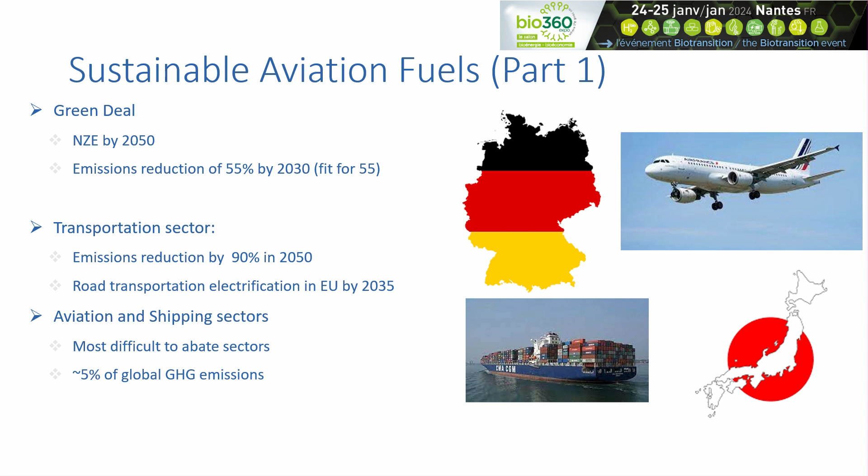So to do so, the International Maritime Organization has set a target of reducing greenhouse gas emissions by 50% in 2050 with respect to 2008. And then the European Parliament, in the framework of the Green Deal, has set more ambitious targets of reducing by 80% the carbon intensity of shipping activity.

And concerning the aviation sector, these targets are more in terms of the use of sustainable aviation fuels, where we have to reach 70% of sustainable aviation fuels in the energy mix of aviation. And with the International Civil Aviation Organization, we already started with a target in 2020 of net zero growth of CO2 emissions of the aviation sector.

So alternative fuels constitute one of the most solid pillars for the decarbonization of shipping and aviation sectors. If we talk about SAF, in 2019 we started to see the first flights using SAF. At this moment in Europe, SAF represented 0.05% of fuel used. The production of SAF has accelerated, and in 2023, the share around the world is around 0.16% of sustainable aviation fuels.

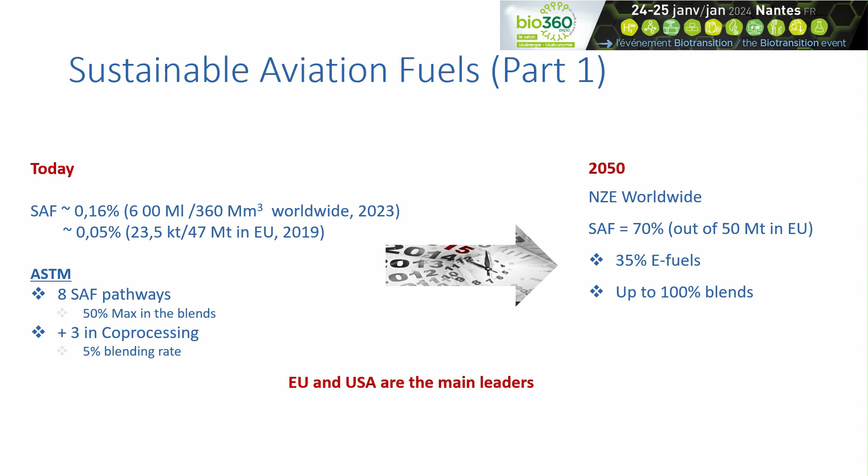So by 2050, we have a long way to go to reach net zero emissions worldwide, according to IATA commitments. In Europe, we have to introduce 70% of sustainable aviation fuels in our mix, which means we also have to increase the blending part to reach 100% blends. And we have a specific target on e-fuels that should cover half of the SAF targets in 2050.

So to reach these targets, I have tried to list here the most important challenges we have to face. First, increasing the potential of different feedstocks and the incorporation level. For the moment, only the HEFA pathway is produced at industrial scale, but we are limited with lipid feedstock. Then we have the 7 other pathways dealing with different kinds of feedstock, including lignocellulosic and waste. And we also have biogenic carbon dioxide and hydrogen from renewable electricity production. So we have to deal with all of these challenges in order to increase the feedstock.

Then according to ReFuelEU Aviation, we have to build around 110 new plants in Europe. And we also have to increase the SAF part in the blends to reach 100%. There are some companies working on that. Rolls-Royce, I think, already has engines that will deal with that, and Airbus is targeting 2030 for this application.

There's an important challenge related to de-risking the investment, so we should have clear and stable policies, and we also need decision tools, because for a certain scenario or feedstock, we have different pathways to choose between. We should have some decision tools to help choose the best solution.

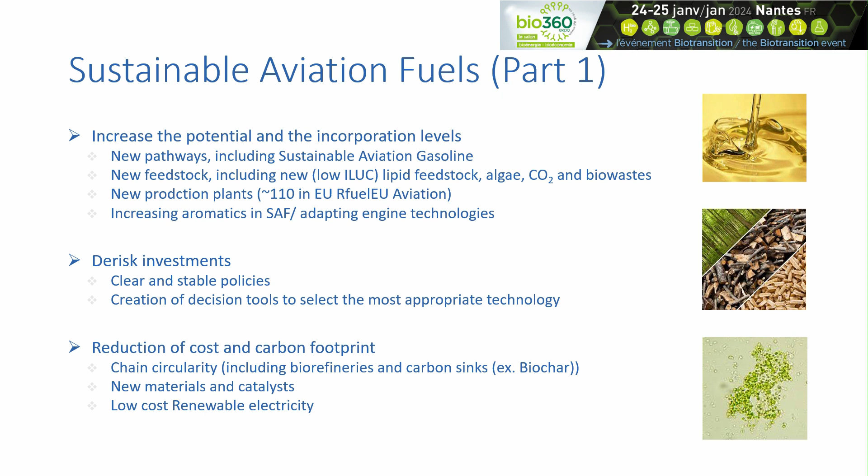We have also to bring new materials and catalysts, and to go further and further with low-cost renewable electricity, which is the case with increasing the renewable share worldwide.

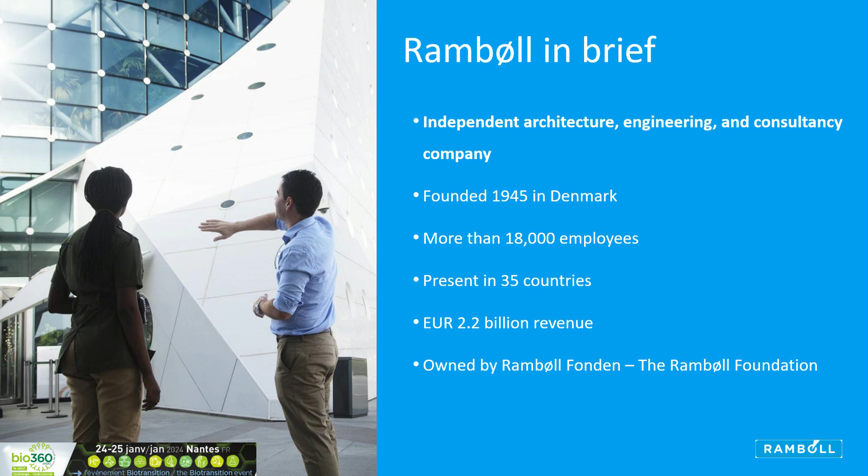Ramboll undertakes projects worldwide with a strong presence in the Nordics, the UK, continental Europe, North America, and Asia Pacific, and can provide sustainable solutions within 7 markets, which are energy — the one I will mainly speak about today — but also buildings, transport, environment and health, water, architecture and landscape, and management consulting.

At Ramboll Energy, our aim is to support our clients' strategy plans and projects and assist companies to reduce carbon footprint, navigate the integrated energy system, and implement smart and innovative solutions.

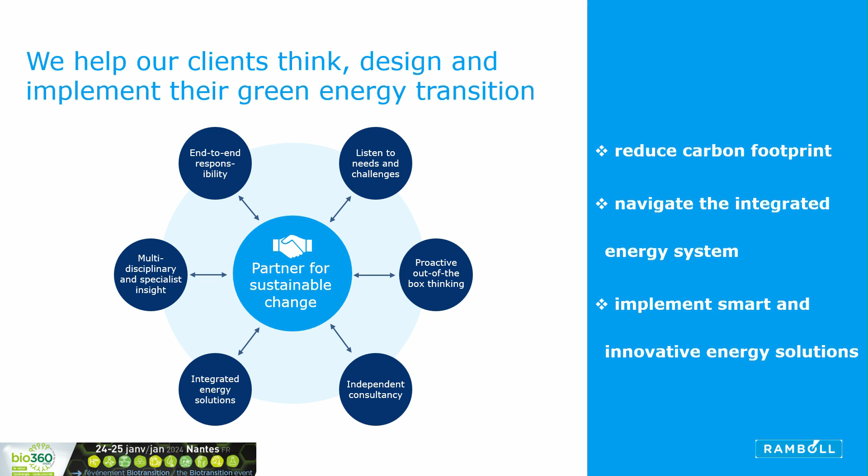Ramboll Energy has more than 50 years of experience in the planning, design, and implementation of energy solutions. But what Ramboll Energy can actually do is provide full project lifecycle services. And what do I mean by that? We can support projects from the very early phases by providing feasibility studies, conceptual design, and technical due diligence.

Following by environmental services, detailed design of plants, FEED studies, owner's engineer, and EPCM, just to mention some of them.

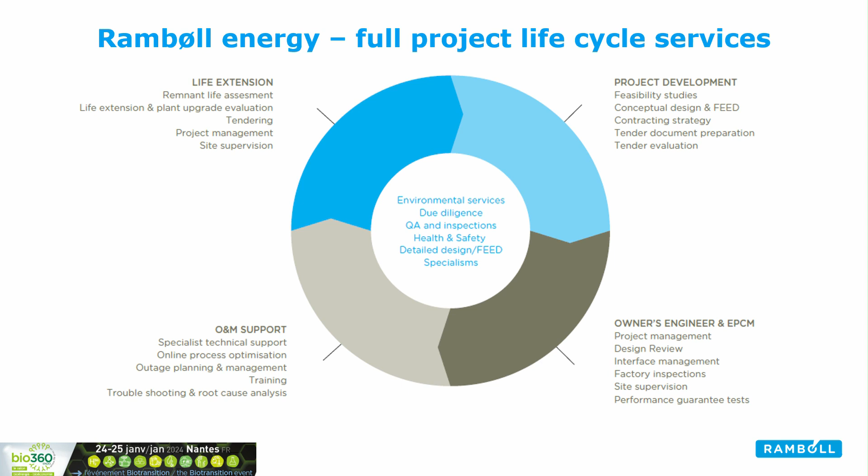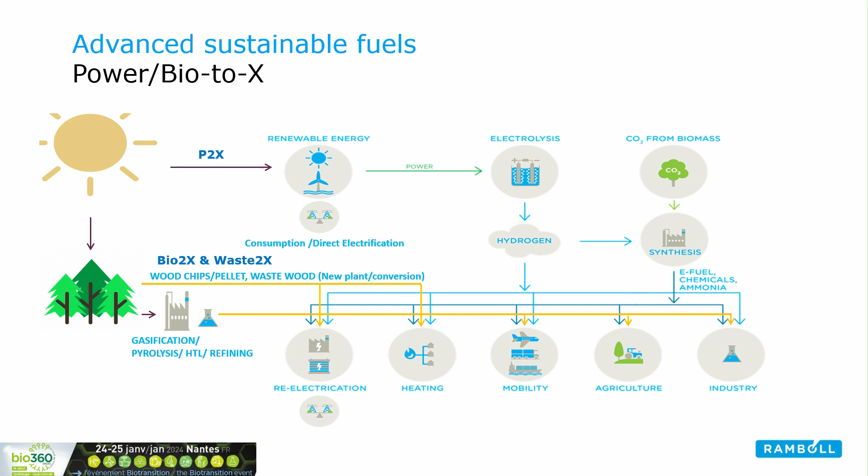At Ramboll Energy, there is a big list of expertise, and one of those is biofuels and Bio2X, as well as green hydrogen and Power2X. The combination of bio and Power2X can lead to the production of biofuels that can be used in the mobility sector, among other sectors, and SAF is an important part of the mobility sector.

Just to briefly mention, in Europe, 3 countries — Germany, France, and United Kingdom — will be the ones that will have the biggest need of SAF by 2050.

Based on SkyNRG calculations and announcements, power to liquid and alcohol to jet using waste will be the main 2 technologies to produce sustainable aviation fuels by 2050.

In order to cover the amounts required by EU mandates, about 400 sustainable aviation fuel plants have to be built by 2050. As for the US, in order to cover the required amount of SAF based on US mandates, approximately 750 SAF plants have to be built by 2050.

So there are 8 certified methods to produce SAF based on the ASTM D7566 reference. In most of them, the blend level is up to 50%. However, for synthesized isoparaffins from hydroprocessed fermented sugars, and synthesized paraffinic kerosene from hydroprocessed hydrocarbons, esters, and fatty acids, the blend level is only up to 10%.

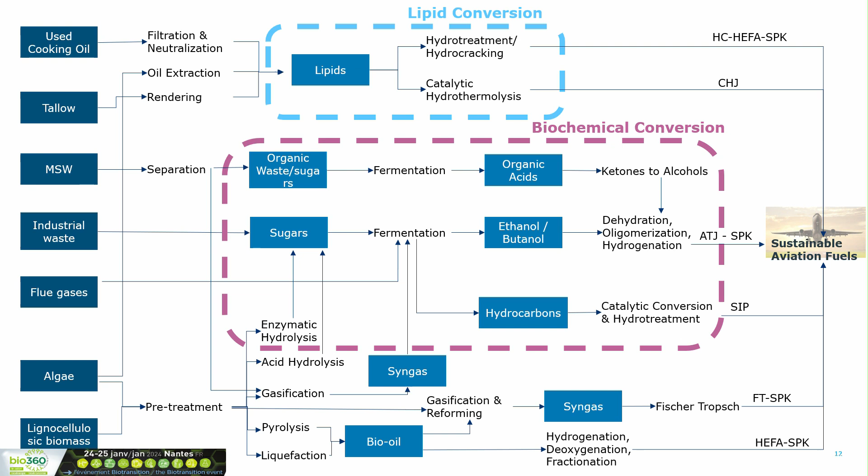And finally is the thermochemical conversion, where technologies such as gasification, pyrolysis, and liquefaction can be used to produce syngas or bio-oil. Fischer-Tropsch technology is applied for syngas, and some hydroprocessing steps for bio-oil, in order to finally produce SAF.

Ramboll has all the expertise in-house, combining them with market player viewpoints and official literature, meaning official publications, articles, specific databases, in order to provide robust market assessment and actually answer questions of our clients based on availability of feedstock in a specific area and how much this feedstock costs.

Can this feedstock have stable composition throughout time in order to have a stable SAF production? Depends on the feedstock. What is the best route in order to produce SAF? And what are the key off-takers? As hydrogen is an essential part to produce SAF, what is the cost of electricity and hydrogen in the area of interest? And what are the possible changes in the future?

What is the expected market sale price of SAF? There are a lot of forecasts giving values. Do all of them agree? What is the conclusion if we combine or compare all of them? And of course, information related to regulations and subsidies. These are only some of the questions that we can answer to support our clients in making decisions around SAF.

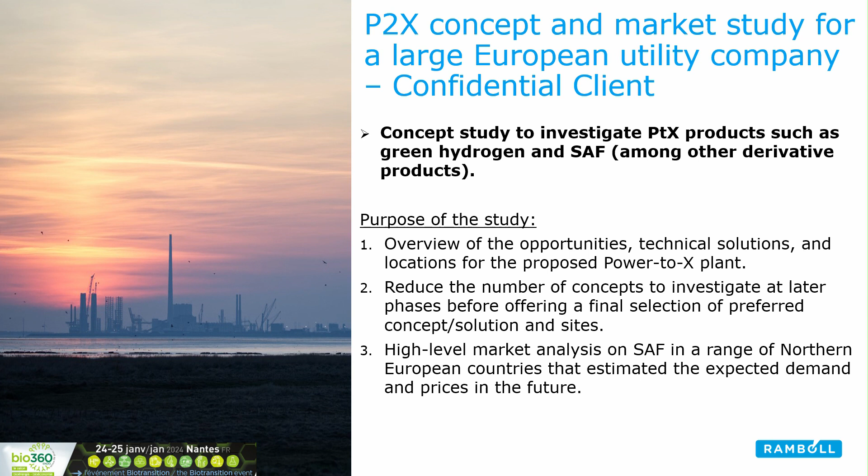The third reference is, again, a market study to determine the viability of selling SAF, but in the Nordics, Poland, and the Benelux region. By analyzing market trends and drivers on SAF, Ramboll offered detailed forecasts on volumes and prices of SAF by 2030 and 2050, supporting the decision-making process of the client.

In the fourth reference, the Norwegian aviation industry assigned Ramboll to investigate and assess possibilities for profitable and sustainable aviation fuels. The study included information such as feedstock supply and available production technologies, as well as a policy instrument study, in order to understand what it takes to implement SAF at the Norwegian airports.

All in all, in order to acquire the required amount of SAF by 2050, projects have to be developed properly. And to do that, successful collaboration between stakeholders is essential. Synergy between bio and power-to-X technology, as well as development and optimization of technologies, is needed to acquire a proven technical concept. It is very important to have accurate information on feedstock availability in order to secure it, as well as a competitive feedstock supply chain.

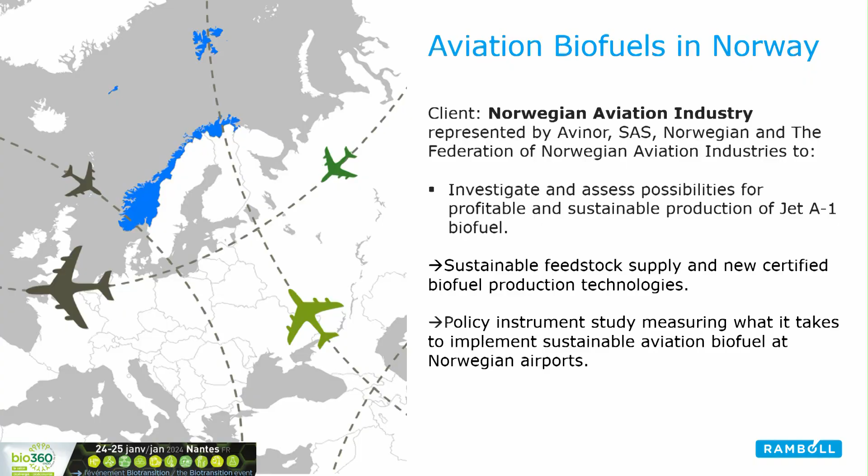Oh, there is actually. So, how can I go back to the graph? The red one.

But this is like sugar to fermentation, you are talking about ethanol, alcohol to jet. But in the biomass, let's say the waste of a sugar factory, for example, like beet pulp or molasses, you can go to gasification to produce syngas. From the syngas, you can add green hydrogen, or complete purely with the syngas to produce methanol, green methanol, or sustainable aviation fuel.

From biomass. Yes. Okay, here I have the lignocellulosic biomass from agriculture, but it's not... Yeah, it's second generation. This is the classical way, just feedstock available around the world, fermentation to ethanol, then alcohol to jet to SAF.

Yes, but from biomass directly to syngas, until now there is no clear pathway approved for this. I mean, I have it from municipal solid waste, maybe, but maybe not the industrial waste. Yes, it goes to sugars.

Okay, no problem. I think maybe it falls under lignocellulose biomass, like wood or beet pulp or any other lignocellulose. Second generation, like straw, you mean? Because I consider only second generation feedstock here. Yes, second generation. Yes, sure. Okay, thank you.

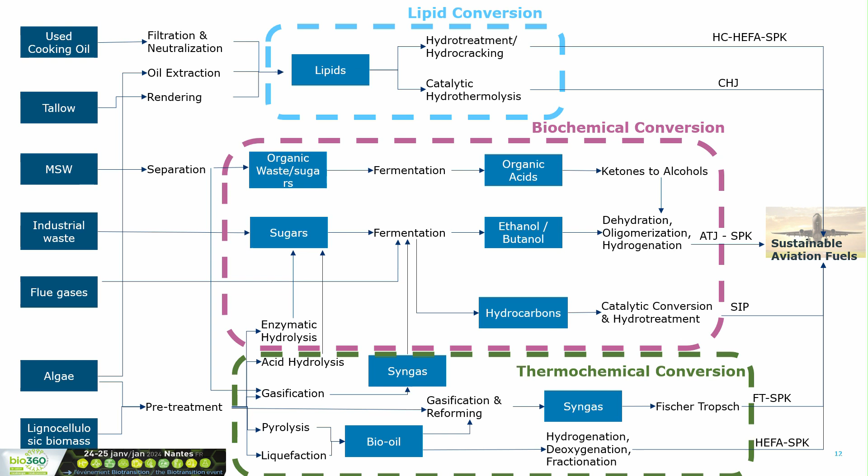Just one last question before we finish. Good morning, I am Jean-Luc Bergonou, working for Johnson Matthey. I would like to understand why the Fischer-Tropsch route is not favorized by the industry, because apparently you are saying that alcohol to jet will be the most important pathway. Fischer-Tropsch was the first ASTM approved pathway. Yes, it's also the gasification in Fischer-Tropsch.

Yes, I've seen the red one, the green one. But why do you consider it will be less important than the other two, alcohol to jet? Because with alcohol to jet, you have to consider that the alcohol has power content 3 times less than FT crude, for example. And FT crude can even be processed in normal refineries, which means there will be no additional capex.

Just to clarify, these are announcements and calculations, not something you can find outside.

Yes, it's a good question. Lignocellulosic biomass has huge potential—it can be used to produce alcohols through fermentation, or used for gasification. It's true, I'm not sure I have a clear answer on that, but I would like to discuss it. Maybe nobody has a very clear answer on that. Don't worry about it. Thank you very much.

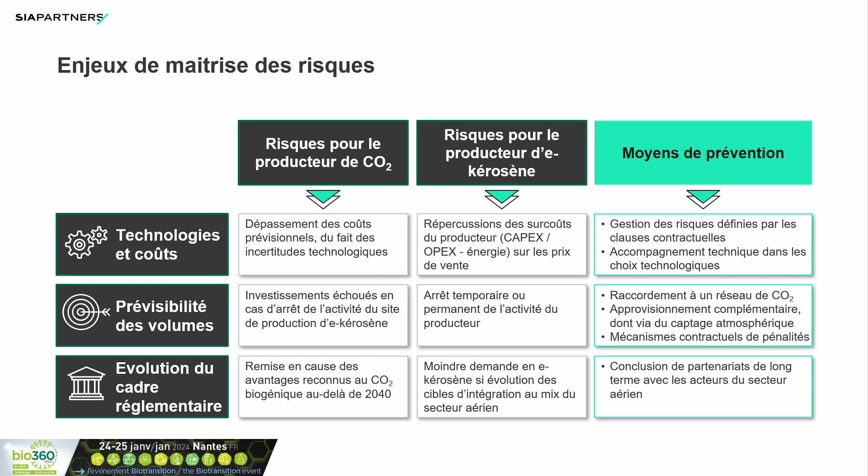Okay, thank you, Yann. I have a question. How do you see the path of CO2 to SAF, power to liquid, whether with biogenic CO2 or carbon capture, economic-wise, especially as the CO2 is not the dominant factor in the price of the SAF? You'll have more than 1,700 euro coming from hydrogen and the OPEX. So in the market now, do you see that anyone can pay more than 2,800 euro for SAF? In this range, it can be economic. Otherwise, if you go to carbon capture, today it is not economic, and after 50 years, it will not be economic.

Yeah, that's a good question. Indeed, given the current technological context, e-kerosene is not competitive with other kerosene production pathways. However, as a reminder, we have those mandatory targets, and in the short term, this is what will drive the e-kerosene market. One of the reasons for such ambitious targets is that there will be a limited amount of biomass available for biokerosene, and we have to invest in other technology, and probably the intermediate target for e-kerosene aims at gaining maturity on Fischer-Tropsch and carbon capture technologies in order to have a competitive e-kerosene by the middle of this century.

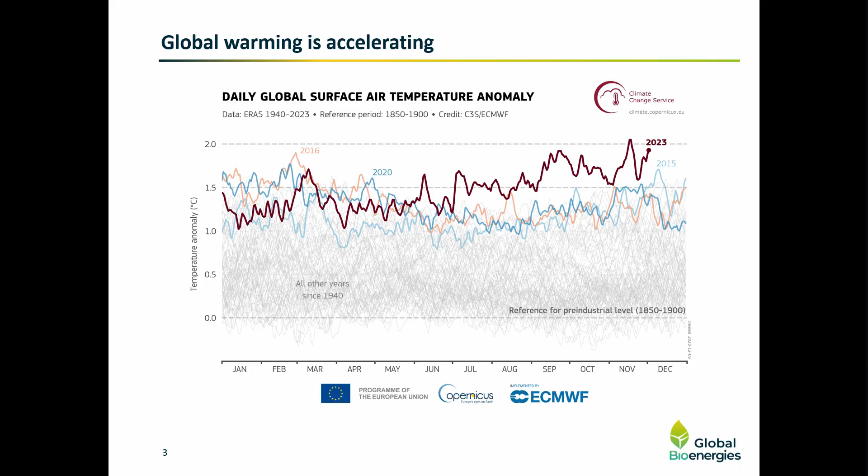First of all, a quick reminder about global warming. These are the figures for 2023. It's getting warmer and warmer. We had a few days above 2 degrees above the pre-industrial era, which was in the books for the end of the century. The Paris Agreement said we expect to limit global warming to 1.5 degrees, maximum 2 degrees, and that's already happening, not 85 years later, but 8.5 years later. So it's happening 10 times quicker than expected. It's really scary now. And there are a lot of things contributing to this global warming, and aviation is really one of these.

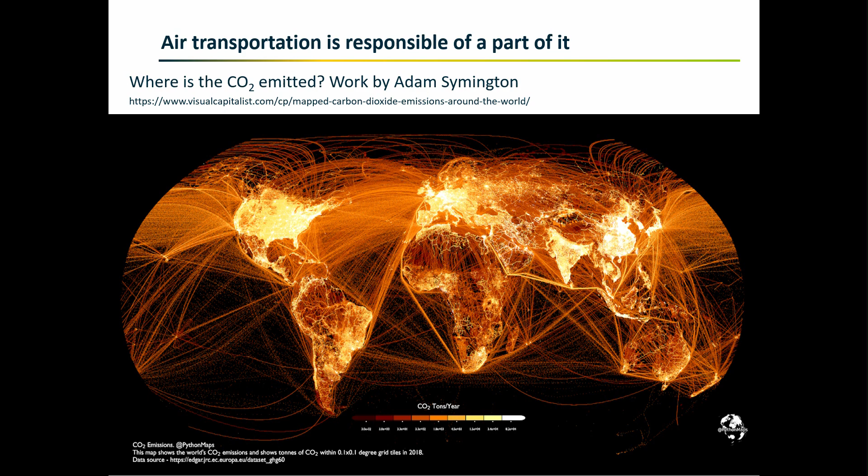In fact, it's only 2 to 3% of the CO2 emitted, but growing quick. So it might become 5%, then 10%, 15% by 2050. And also there is a kind of double impact coming from the contrails. Maybe you know that when a jet is flying, it produces not only CO2 but also contrails, traînées de sillage in French. And these contrails are creating clouds which are contributing to the global warming. So air transportation is really in the list of things to do if we want to keep global warming under control.

That's us, Global Bioenergies. We're a small company. We're 50 people. We're listed on the Euronext. We're 15 years old. And during these 15 years, we have done only one thing. We have developed, and we start exploiting commercially, a process to convert renewable feedstocks, sugars, into isobutene, isobutene being one of the main molecules of the petrochemical industry. And there are a lot of applications, including in the sustainable aviation fuel.

And we are pretty much at the crossroads of green chemistry and industrial biology. So it's a biological process, we use microbes, but it's also a chemical process, and you'll see all this more in detail in the next slides. Today, our real vision is to impact the world of sustainable aviation fuel. We have a new technology. We're pretty much the new kid on the block. It's been ASTM certified last year, 6 months ago, in fact, only. And that's really our vision. We're going to deploy this technology widely and abate a lot of CO2.

On the short term, it happens that this technology also has niche markets, especially in the cosmetics. And so it helps deploying the technology, starting to sell, starting to produce. And so we have this situation where we have a short-term market in the cosmetics, and we embarked L'Oréal, big L'Oréal, in the story. And we have a long-term vision in the sustainable aviation fuel. When I say long-term, I mean 2030. 2030 is really the day the sustainable aviation fuel market will really open. Before that, it's going to be only about waste cooking oil.

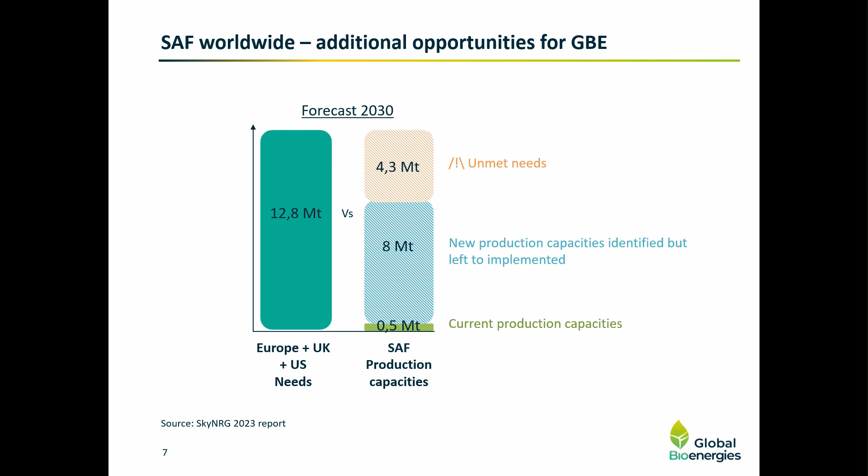So that's our technology. We have engineered a microbe, a bacteria. We have completely rewired the way it works. All the genes inside have been changed, and we change a lot of things in this bacteria. And when we give sugar to this bacteria, it produces a gas which is named isobutene, which is one of the big molecules in the petrochemistry. 15 million tons of isobutene are produced from oil every year. And isobutene being a gas, it volatilizes spontaneously from the broth. So it's a very innovative process. It's an artificial metabolic pathway. We've been the first one to do that.

It's the first process to a gas, hydrocarbon gas. So a lot of new things, a lot of IP. We have developed an IP fortress around this process. And then when we have this isobutene, remember biology converts sugars into isobutene, and then we just have to stick the molecules 3 by 3, and it becomes sustainable aviation fuel. So we give sugar to bacteria, it produces a gas, we send the gas through an oligomerization tube, and we end up with sustainable aviation fuel. Very direct. It's the most direct technology to sustainable aviation fuel.

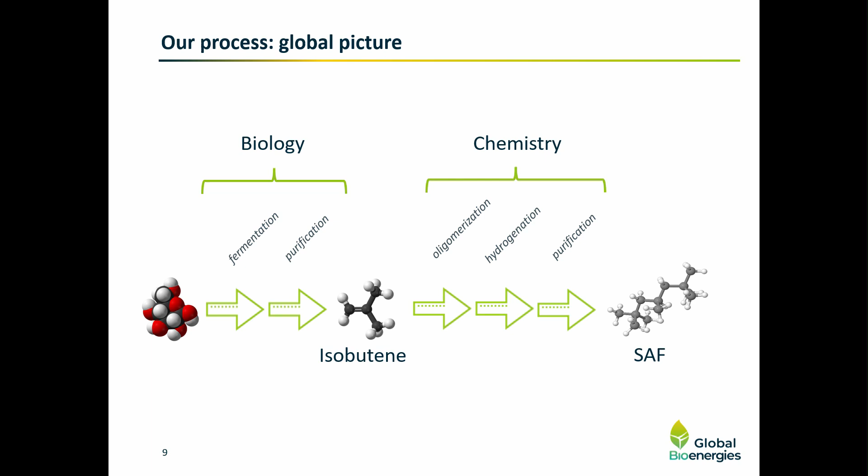So these molecules are liquid. It's a kind of light liquid, called isoalkanes or isoparaffins. What is interesting is that it has very good cold flow properties. When you are running a plane, you are at 35,000 feet. The temperature is -50, and at -50, many molecules would clot. And then you clot your pipe, and then you're ending with troubles in your combustion. And because there is no parking in the sky, the troubles can be very, very damaging. So you absolutely need to be sure that your liquid will flow at this very low temperature of minus 50.

The standard says minus 47. So when you want to register a new molecule, you have to prove that you're still liquid at minus 47, and we did that with our molecule. In fact, at minus 47, we were still liquid, so we were very happy. But then we said, can we go below? And so we went down to minus 60, still liquid, 70, still liquid, 80, still liquid. So in fact we have wonderful cold flow properties, which means that our molecule is not only a good fuel, but it's also a kind of anti-freeze molecule.

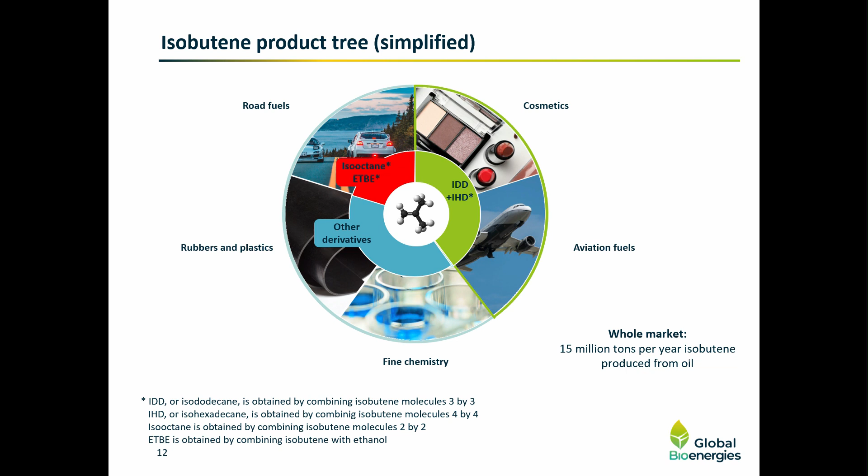So where are we today? Back in 2021, we had a demo plant in Germany, from which we produced the first tons. These first tons, we used them in cosmetics. We did some demonstration in the makeup especially, and we did a brand containing these molecules. More recently, we started a commercial unit in eastern France, close to the city of Reims. And now we're producing more tons at a higher pace, and we're starting to sell. We announced our revenues for the first half last year, 3 million euros.

We're starting to sell. We have a larger plant in the plans for 2027, and it's going to be much bigger. It's going to be in France, and it's supported by the state. We received 16.4 million euros to build this plant from the government, from France Relance. And then we see the deployment in 2030 in sustainable aviation fuel. There is no need to produce sustainable aviation fuel before, because there is no market. There is no market before 2030. The mandate says 2% in 2025, but it's all going to be taken by oils.

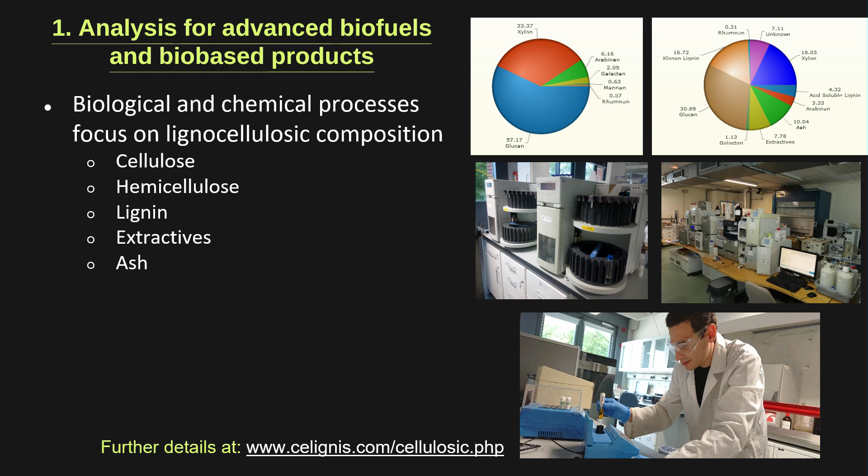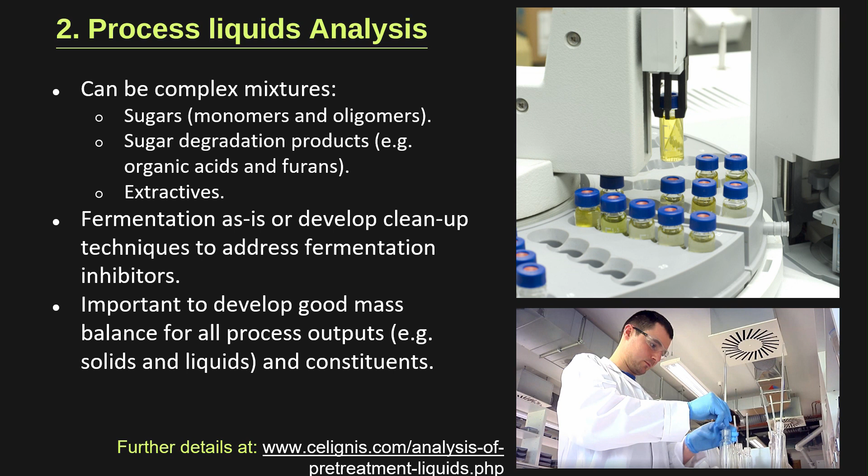One thing we do in a lot of detail is we look at the liquids that come out of the process. That's really important to understand when you're developing a technology or evaluating a process, you've got all kinds of different things going on. Let's say you have a lignocellulosic material, you want to get the sugars out. Well, they may not come out entirely as monomers as you'd like. They may be oligomers, they may be degradation products. These may be beneficial, they may be detrimental. We can detail profile these, and we can look at ways of trying to understand the mechanisms in which they are formed and how that can be steered in the right direction for whatever the process is that's being considered.

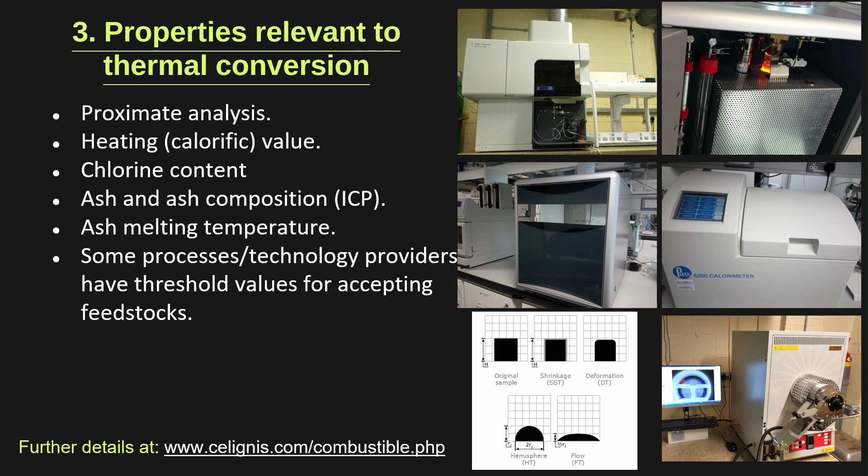We do work as well related to the thermal properties of biomass. This is particularly important when you're considering, let's say, the residues of a process. So if you're following a biorefinery approach where you try and exploit the maximal value from each constituent of biomass, you're inevitably going to have residues. And if you can't think of alternative uses for those, then combustion or gasification or some kind of energy production system is appropriate. We have all the technology and infrastructure to give a detailed understanding of that for feedstocks.

And then we do a lot of work as well with anaerobic digestion. We do all of the kind of analyses you can really think of in that sector, the basic ones, VFAs and volatile solids and so forth. We do biomethane potential tests, but we also do really in-depth biological studies related to the process of anaerobic digestion. So we look for things like toxicity assays, we look for the microbial activity of the output of a digester in order to see how well it's doing at each of those stages of the AD process.

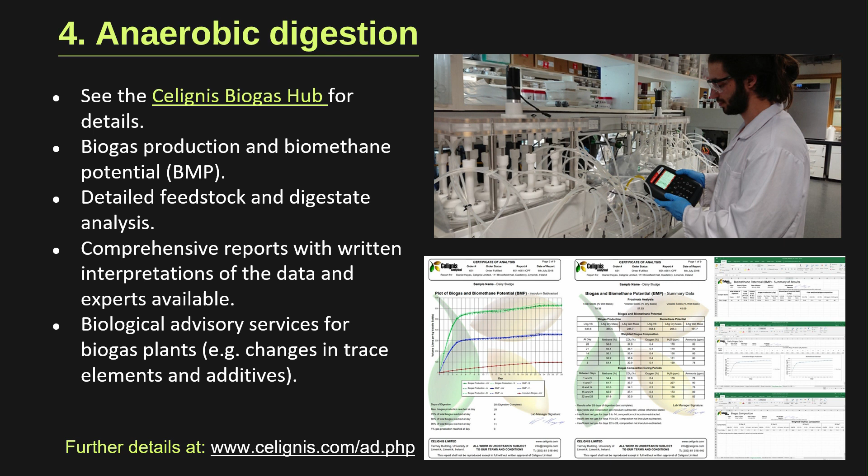Another thing we do, which I see is very popular here at this conference, is work related to biochar. We characterize biochar samples for all different kinds of properties related to carbon sequestration, thermal treatment, soil amendment, plant growth trials, and so on. We do this under the auspices of the European Biochar Certificate methods, so we can see if a certain material will pass or fail those tests.

We can also understand the feedstock and give suggestions on what is the most appropriate feedstock to produce a biochar, and what are the best conditions to process that feedstock to get the biochar. And we can also produce this biochar on a small scale in our laboratories.

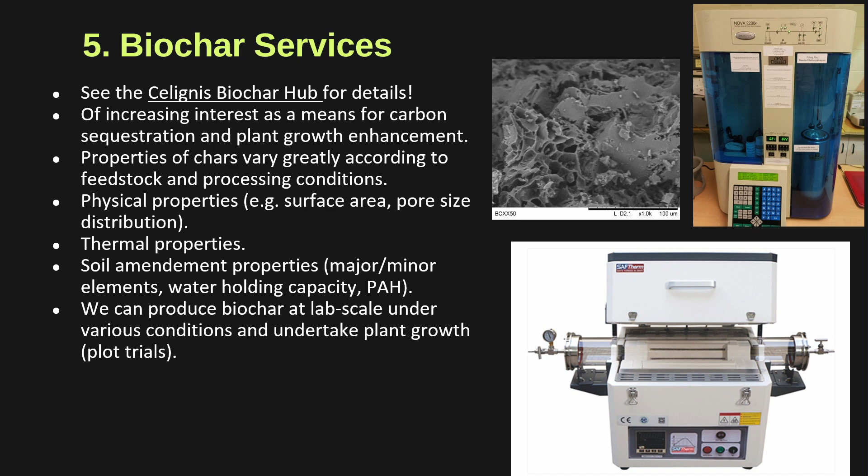Another thing we do is go into the much higher value constituents present within biomass. This is kind of like biomass detective work, looking for the high value, maybe low abundance, but extremely interesting materials present within the feedstock.

An example recently that was of much interest would be the cannabinoids from hemp, CBD, CBG, and so forth. Now that market has fallen out and the price has dropped substantially in recent years. But if you were the first one there with CBD and CBG a couple of years ago, there was a significant amount of money to be made. What we can do is profile feedstocks and look for those hidden gems within the chemistry of the biomass.

We do a lot of work as well related to biological treatment of biomass, whether that's enzymatic hydrolysis or the fermentation of the sugars that are liberated. We do that at various scales, up to 100 litres, but moving to cubic meter scale going forward this year as well.

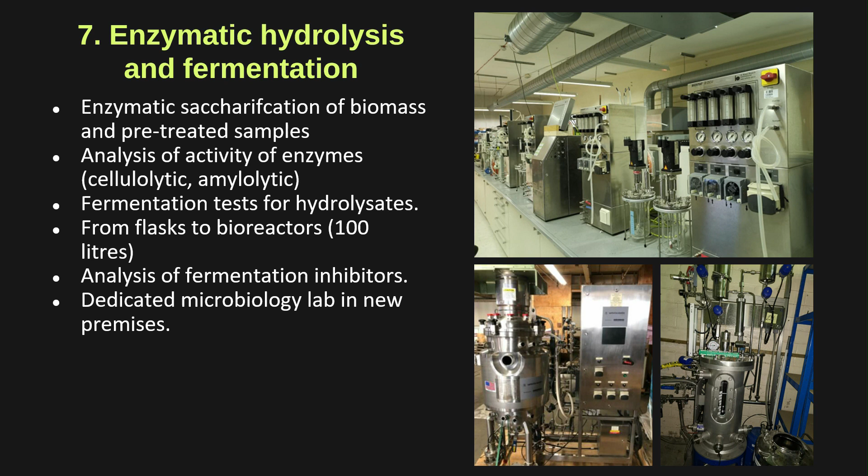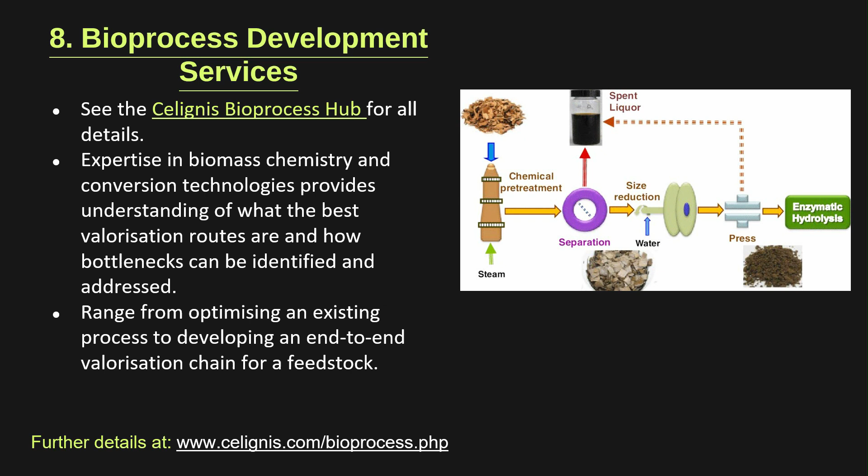We also do work related to bioprocess development. For example, we can develop a full bespoke process for someone looking to produce ethanol from a feedstock. We can look at the pre-treatment, the hydrolysis, the fermentation, or we can audit an existing process and see where the weak points are, then do experimental work to improve the conditions and optimize the process. These are just some examples of the bioprocess project work we've done here.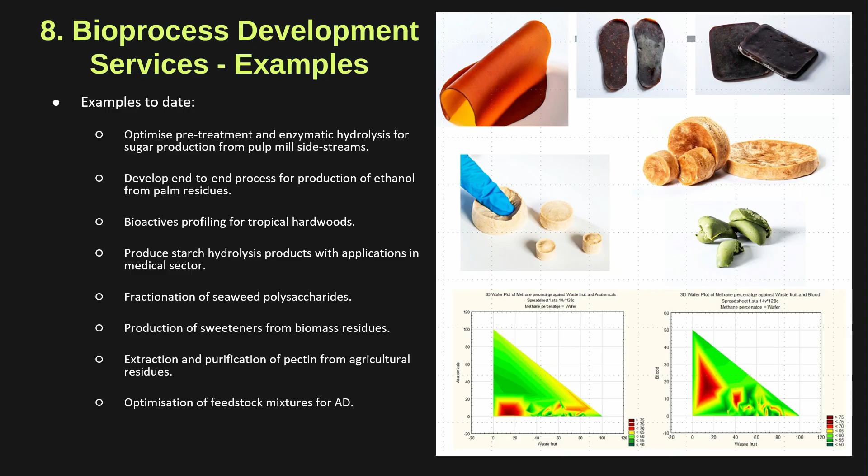Moving on to the seaweed-particular aspects, firstly terrestrial biomass. You all know first-generation biofuels, basically in simple terms, that's when you take a food or oil crop and use it to make a biofuel. You can use carbohydrates in the form of starch or sucrose to make, let's say, ethanol, which can be converted to jet fuel, as we've heard earlier, by the alcohol-to-jet process. Or you have lipids, which can be hydrogenated to make the sustainable aviation fuels we've heard of previously.

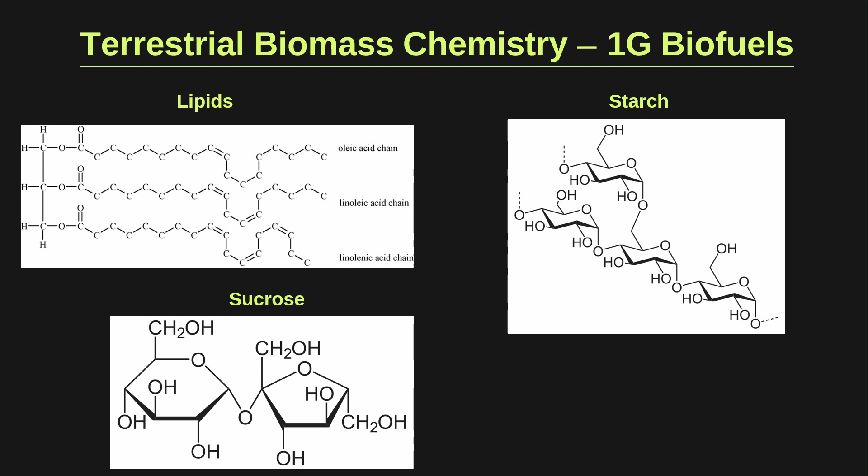In terms of second-generation biofuels, you're dealing with polysaccharides of a different nature. Cellulose, for example, is all glucose like starch, but arranged in a very different way, which makes it much more difficult to break apart into constituent units. Hemicellulose is also more complex because it has different kinds of sugars that may be more difficult to ferment than the glucose in cellulose. And lignin is another material, a very complex polymer that so far has been challenging to produce biofuels from. On the left-hand side, you can see an image representing the steps needed to valorize lignocellulosic material.

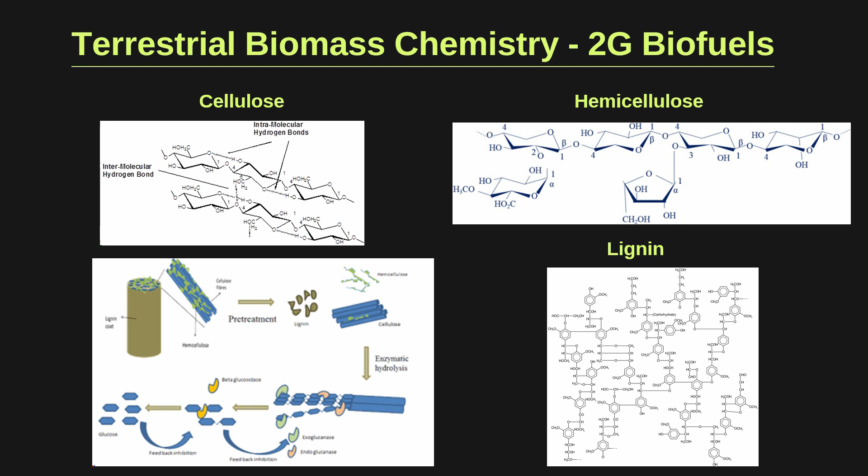This is a representation of some of the pathways that are used to process lignocellulosics to biofuel products. This is also applicable to the SAF route. So as we've heard from the previous speakers, there's basically two routes. There's the thermal process where you gasify a feedstock and then you go through, let's say, an FT synthesis to produce a fuel that's suitable for aviation.

Someone asked earlier why FT is not considered going forward as a mass market fuel. My answer to that would be basically it's an economy of scale issue. This technology has been around for a long time. You need to have a significant sized facility in order for it to be economically viable, and that hasn't proven to be the case yet with biofuels.

There was a facility in Germany that closed down about 10 years ago called the Choren technology. That was using wood to FT diesel. There have been recent advances in what's called micro-FT. However, these have yet to translate into economical biofuels on the marketplace.

Another route would be pyrolysis to produce a bio-oil, which can then subsequently be hydrotreated again to produce an aviation fuel. There's a number of companies looking at this at the moment. One example would be Alder Fuels in the US.

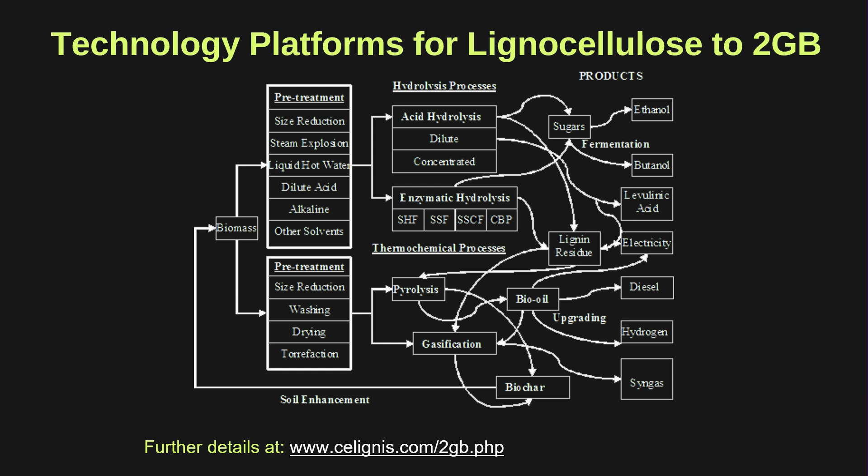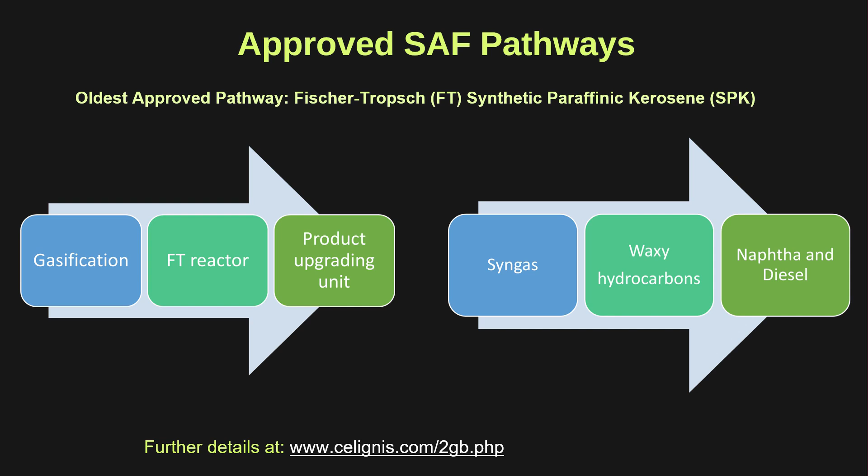So this is just a simple graphical representation of some of these approved pathways that we've heard about earlier. I won't go back over those because you've previously heard how they work. So the gasification route involves high temperatures. It produces a syngas. There are complications related to this, and these vary in their importance depending on the type of feedstock that you're looking at.

So the major problem you have with biomass is the production of tars that can condense on your catalysts and reduce the efficiency of the catalytic process. Moisture is also a problem. You generally need to use low moisture content feedstock for gasification, and ash or inorganic material can also be problematic as it affects the thermal profile of the material, and it can also interfere with catalytic downstream processes.

Also of great importance is the sulfur and nitrogen content. These really result in NOx and SOx emissions, and this is certainly an issue with seaweed where you have high protein contents and high sulfur contents due to the sulfated polysaccharides that are present.

The other route, again, as you've heard, is the alcohol route. So you can either produce directly a product via fermentation that is suitable for aviation fuel, or you can go the alcohol-to-jet route, for example, that is being pushed by companies such as LanzaJet.

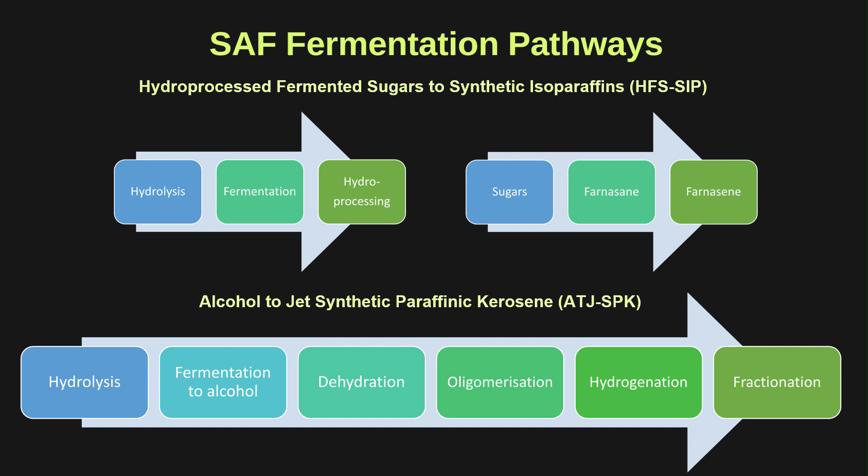So I'll just move on to the chemistry of seaweed and why it's so different and why it's so complicated, but also why it's quite exciting. You have three types of seaweed that are out there. You have brown, green, and red seaweeds. And these vary in their chemistry, in their potential applications, and in their seasonality, regions of production, and so forth.

Brown seaweed is oftentimes of much interest in European climates, and that has a very particular chemistry related to it. So there is cellulose present, but cellulose is one of the minor polysaccharides in most seaweed species. Instead, you have other types of polysaccharides, and the major one of interest, traditionally with brown seaweed, has been alginate. And alginate is a polymer of two uronic acids, mannuronic acid and guluronic acid.

These can vary in their relative proportions and their substitutions. However, this polysaccharide has various applications in food, in cosmetics, and various other market applications. Mannitol is a storage carbohydrate in seaweed. It is a sugar alcohol that's present on the right-hand side there.

Fucoidan is a sulfated polysaccharide containing fucose units, along with some glucose and other constituents. And laminarin, again, is another glucose polymer, but very different from cellulose. It has a much shorter degree of polymerization, and it has one or two other sugars in there, the terminal end units.

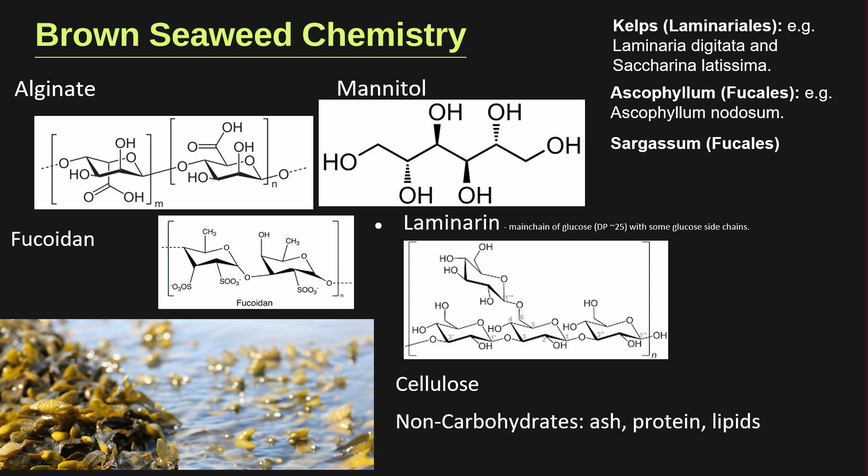Red seaweed, an example would be Palmaria palmata, has, again, different polysaccharides, which require different technologies to fully efficiently valorize them. One of the main constituents in red seaweed would be agar, and agar is a polysaccharide containing two major units, agarose, which is a repeating disaccharide, and agaropectin, which is a disaccharide containing uronic acid residues.

In general, red seaweed has a predominance of galactose, which is a 6-carbon sugar. That is the main sugar in carrageenan, along with an anhydro form of galactose. There is also cellulose present in red seaweed, and there's mannan as well in the sulfated form present.

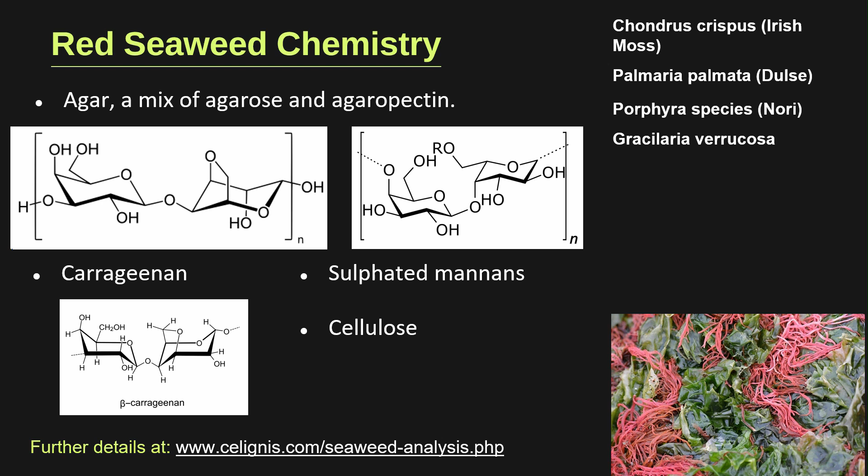Finally, you have green seaweed. In that seaweed, the main polysaccharide of interest would be called ulvan, and that is a polysaccharide containing various uronic acid residues. So glucuronic acid in one form, iduronic acid in another form, alongside rhamnose and some xylose units as well. There can be some cellulose also present in green seaweed, and also some xylan polysaccharides as well.

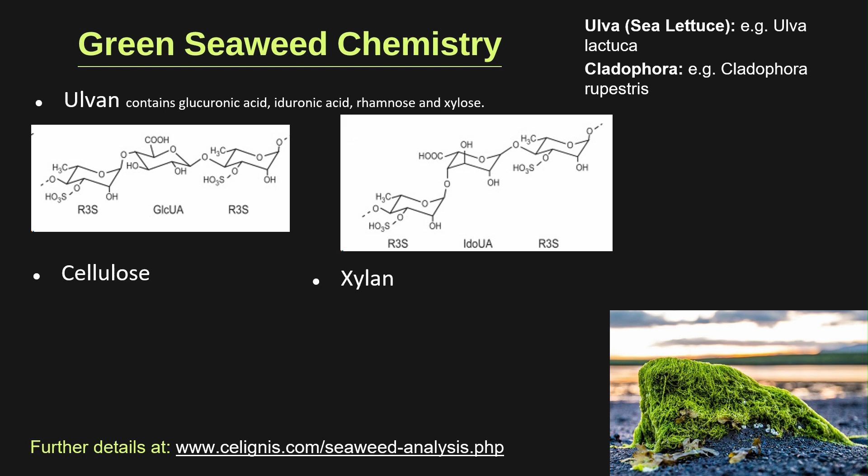So related to all of this then, how does this work in the context of sustainable aviation fuel? The first thing to say, there are some advantages of seaweed. Before we get to the disadvantages, because there are plenty, there are some advantages, right? You have an abundant resource, it already exists. There is no land use conflict, because obviously it exists out in the sea. It has a low cost in certain cases if it already exists.

The logistics is a different factor. But it can be a low cost, and it can also be high production if you even do it in a cultivated context, which is an interesting prospect going forward with some suppliers. And it really has a lot of value, seaweed, in a biorefinery context. I think if you only consider seaweed as a feedstock for SAF, you're going to run into trouble, because you're producing a final product that is a relatively low price.

However, if you look at all that interesting chemistry you have within the seaweed, not just the polysaccharides, but various bioactive materials, polyphenols, and so forth, you can get much higher value from those. You can produce those in low volume, high value. High volume, lower value SAF suddenly becomes feasible when you consider it as an entire biorefinery context.

However, there are challenges. So one of those is logistical. No one has really tackled on a mass scale the logistical operation of harvesting large volumes of seaweed that is extremely wet, getting it to a central facility, and producing a product at scale, which would be necessary for many of the SAF technologies, for example, the FT diesel route.

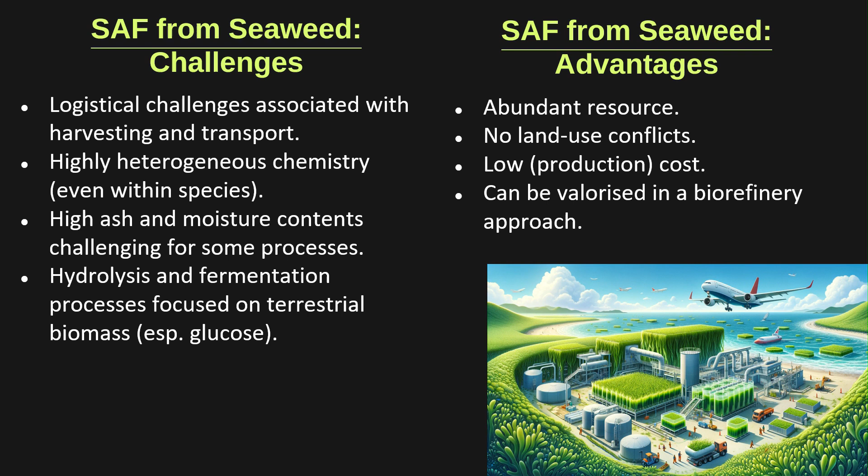So just finally then, I'll just mention some of the work we do at CELIGNIS specifically related to seaweed. So over the last couple of years, we've had a huge interest in the work we've done related to seaweed. We have a lot of inquiries, a lot of people asking, why don't you do this, why don't you do that? So we have a whole list of packages now. Some of these are related to the SAF route, such as the carbohydrates, but a lot of them are related to the high-value constituent bioactive properties of seaweed, which are very valuable when exploiting it in a biorefinery context.

Beyond that, at CELIGNIS, we have also worked on bioprocess development projects for our corporate clients, where we have taken their seaweed samples and developed a bespoke process for them. So that could be extraction of polysaccharides for use in cosmetic products, use in biomaterials. It could be the production of sugars from these feedstocks, or it could be a full stream process moving from the feedstock to the hydrolysis to the fermentation to get a final product.

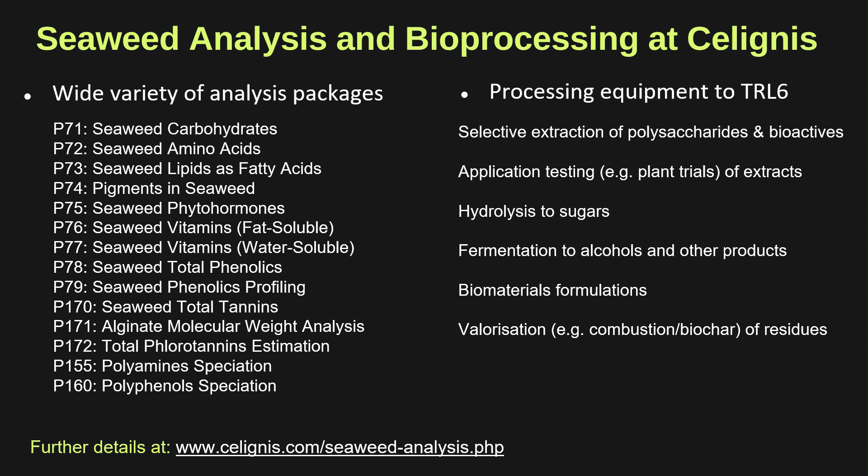Okay, I have maybe one question about the heterogeneous aspect of the seaweed. You have different kinds of sugars, of polysaccharides, so you don't find each time the exact enzyme to do it, or it will be very costly. So do you think that chemical hydrolysis could be a good solution here, dilute acids for example, or something like that? What do you think? It's certainly one of the options to look at, yeah.

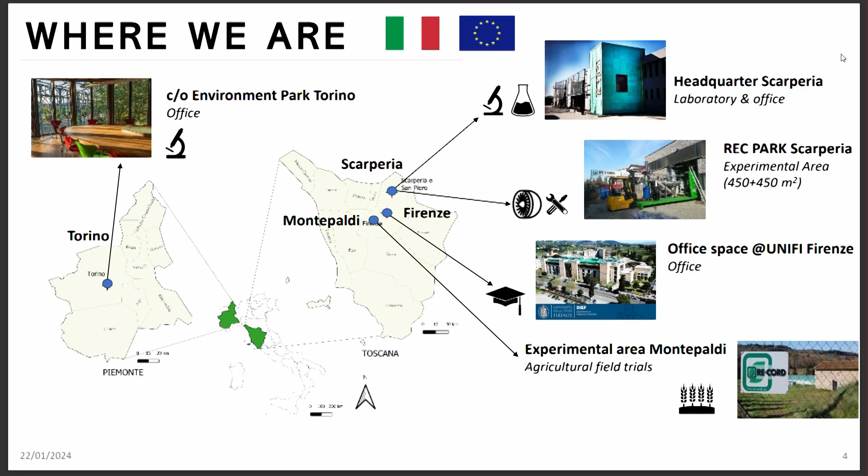So very briefly, in our technological experimental area, we have a 100 kilogram per hour rotating kiln, a continuous plant, where we produce biochar for our research projects and for our clients. We also have other prototypes. We have a continuous HTL, 1 kilogram per hour. This might be of interest. And recently, our latest prototype turns waste into biocarbon and nutrient-rich, especially phosphorus-rich material that can be used as fertilizers.

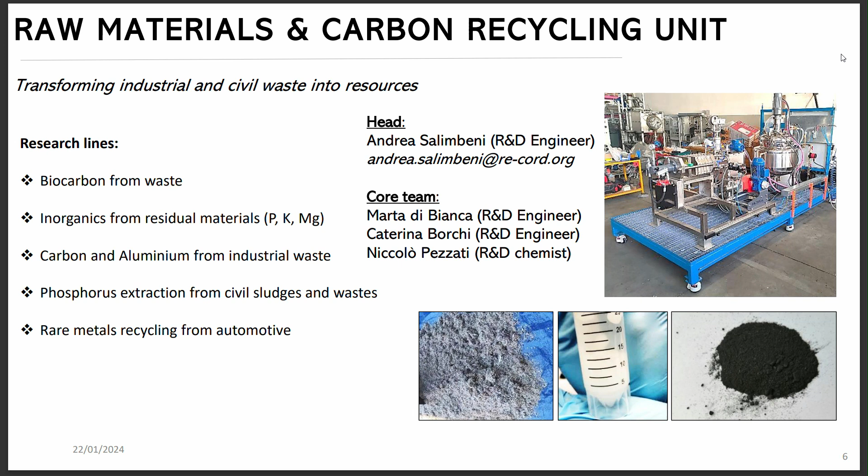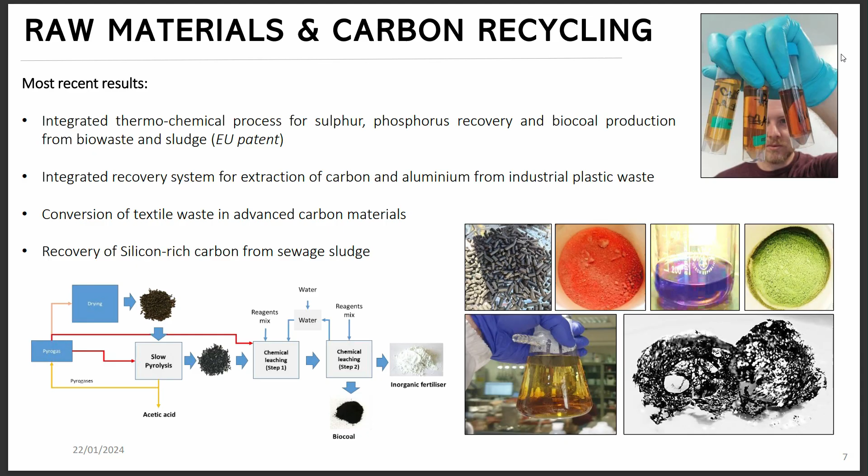This is a patented process that my colleague Andrea Salimbeni at our stand can explain much better than me. You take, for example, wastewater sludge or other industrial effluents that you first pyrolyze and then extract phosphorus from. So you have a biocarbon that is fit for the decarbonization of the steel industry, and a phosphorus-rich residue, which can be used as a fertilizer. The chemical leaching process you see is the one I was mentioning. So we have quite a bit of work going on for technology.

We also have an agronomic experimental area. We have 1 hectare of fields where we perform field trials, especially lately with biochar as a soil amendment, which is the topic of my presentation today. We also have experience in anaerobic digestion and microalgae lab photobioreactor construction. And we have a climatic chamber for indoor trials. With lysimeters, we explore nutrient use efficiency and water use efficiency in various conditions, including when using biochar, and the nutrients that exit or don't exit the system.

That's the picture that you see up right. So, we have many agronomic trials that we have been performing, especially with biochar, co-composted biochar, in different settings. For example, the image that you see with the green field is an organic barley trial that we made with the co-composted biochar. So basically, to see the effect of this treatment as compared to business as usual nitrogen inorganic fertilization. And we'll see some more results after.

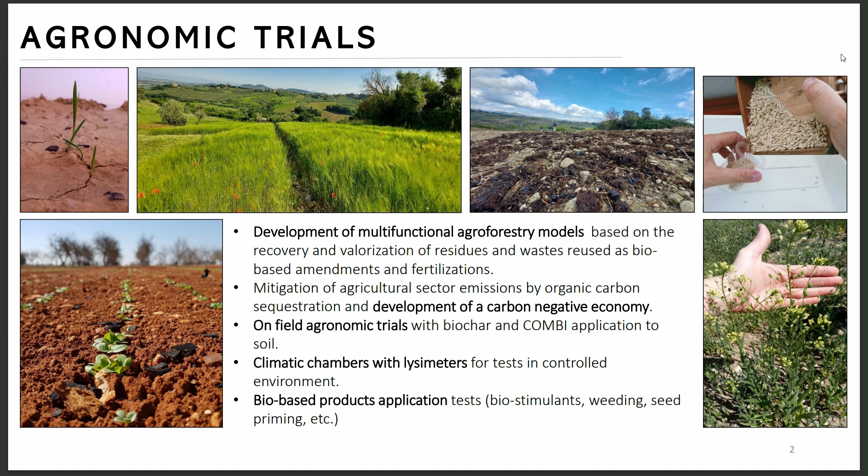We did a trial in Spain, a 5-year trial in Spain with camelina, which is what I'll be talking about today. So many different things where we have gained some experience and insight on the use of biochar in soil. So going back to the project that I'll be presenting today, the Bio4A project is a H2020 5-year project that has just been concluded actually in June successfully, although sometimes it was difficult, but we, let's say, succeeded in finishing it.

So the project concept in 2018, of course, was to accelerate the deployment of aviation biofuels and support the accomplishment of pre-commercial plants. We're talking about 2018, of course. So to bring SAF from HEFA to a full commercial scale in a new plant using residual lipids like UCO and tallow. And point 2 that you see in the project objective is to investigate alternative supply of sustainable feedstock, recovering marginal land prone to desertification, so fulfilling the requirements of low ILUC production of virgin lipids. Also to test the entire chain.

So the results of this project are that we, through ENI, produced 1,000 tons of SAF through HEFA from residual lipids. Actually testing a slightly different route because they used naphtha long cut to produce HEFA. So this is a pathway that was theoretically possible but not completely demonstrated at a commercial scale. So this was delivered for commercial flights in a non-segregated mode through KLM at Schiphol airport. So it was blended in commercial facilities. And then we did this R&D work on marginal land in Spain and Italy that I will present now.

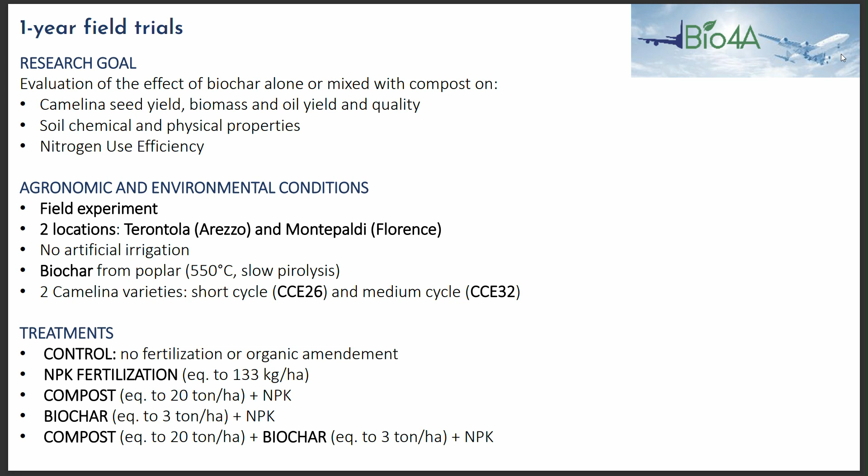And this is what we did in this field trial. So we said, okay, this is a drought-resistant plant, but what happens if I put biochar in soil? What happens to the yield and what happens to soil? So we compared compost, biochar, compost and biochar, and the business as usual, which is NPK fertilization, and of course control, in 2 different locations in Tuscany to account for different types of soils. So this is the design of the experiment. We also compared 2 different varieties of Camelina, one short cycle and one medium cycle.

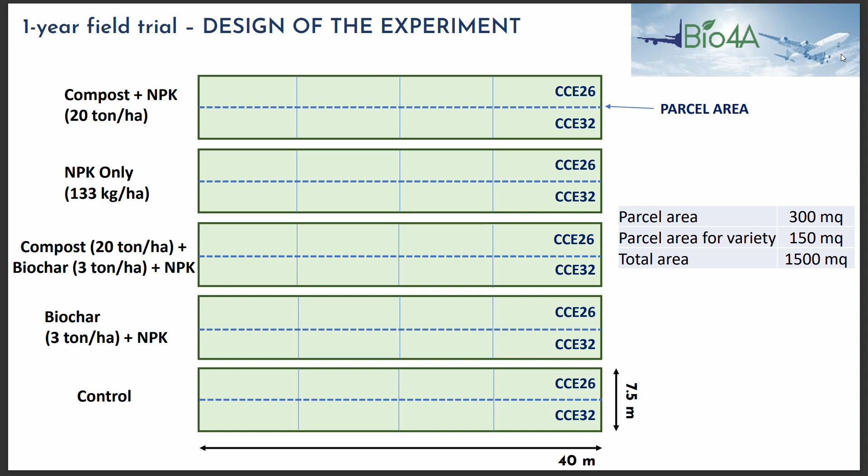As you can see, the applied dose of biochar was quite low because it was a 3 tons per hectare equivalent. In literature you can find from very large amounts to normally 5 to 10 tons. This is the application that I would recommend if I started the experiment now. So this was done, as I was saying, as a 1-year field trial. So we started in March and April to harvest in July. We performed soil sampling analysis before and after, of course.

It was a very dry season. It was the second driest year in the last 10 years. So there is not only the problem about temperature, as we know, but also the problem about rainfall patterns, because now more and more we observe that yes, you may have the total annual amount of rain comparable to what you were used to, but the events are much more compressed, followed by a long period of drought, and this is not good for agriculture. Good for agriculture is the type of rain that we had this morning, this tiny rain that gets down and soaks everything. So we had also very high temperatures.

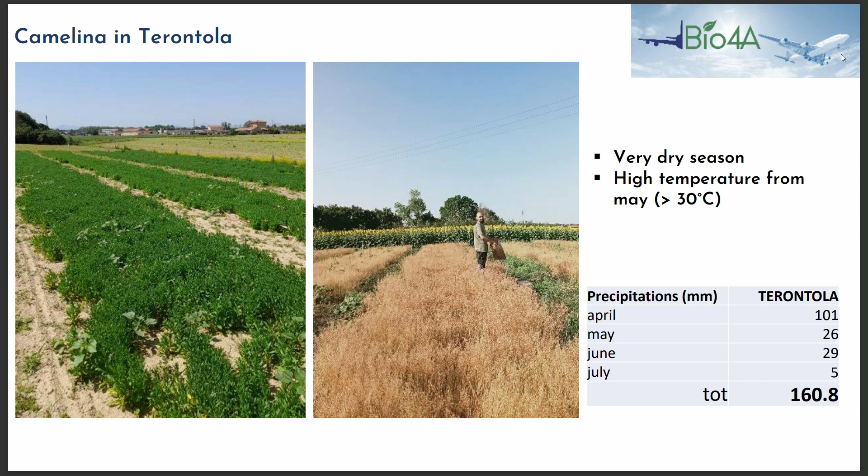So from seeding to harvest, 160 millimeters. It's really not much.

So the results on yield, this is on aerial dry biomass. In the first location in Terontola, I must mention that this is a much more sandy soil. As you can see, there is a partially positive, statistically significant positive effect of biochar and the combination of all the organic treatments.

In Montepaldi, the results were not statistically significant, so there were no differences, but the yield was really very, very low because this is a very different type of soil. It's a clay, much more clay soil, and plus also the total rainfall was even lower.

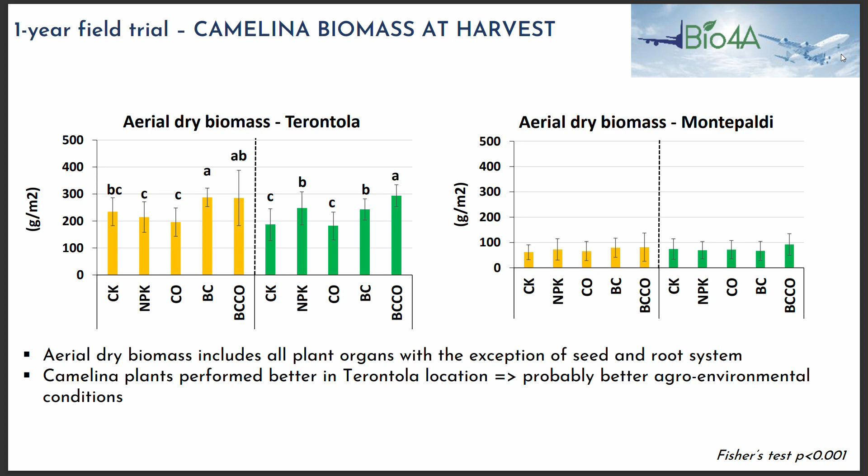So going to grain, which is what is interesting for us, to SAF producers, let's say. As you can see, there is an indication of an increased seed yield, especially in Terontola for the short-cycled variety, CCE26. This is also quite interesting because camelina is normally sown in the autumn for harvest in summer, and this highlights the possibility of having a real short cycle, so something that is seeded in spring and harvested in summer.

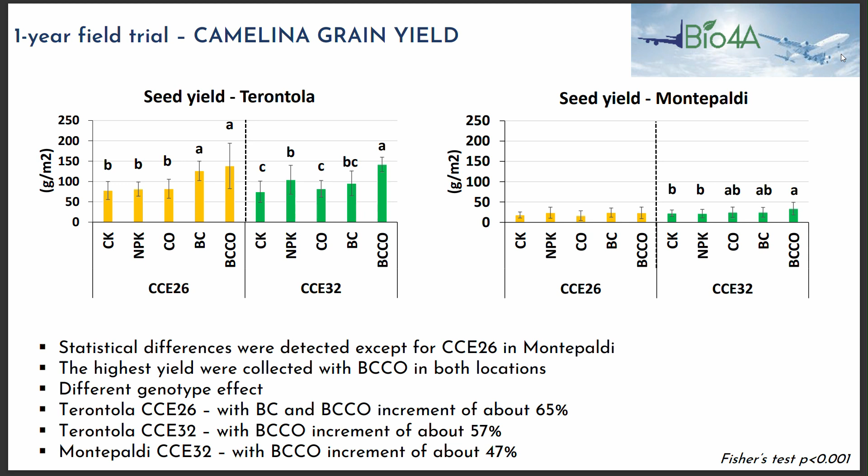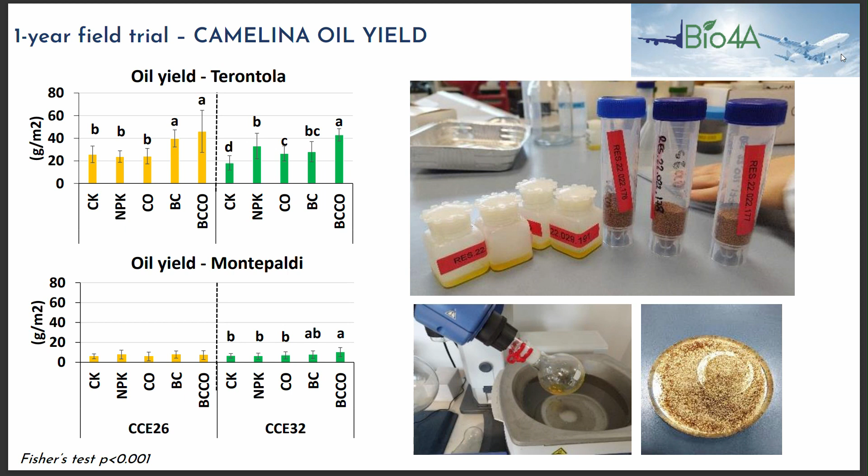There was also an interesting effect on oil yield, which means the total. So you have the grain yield plus the oil content of the seeds. This is a multiplication that you have to make. So this is also interesting for the nutrient use efficiency of the cultivation of camelina with biochar.

So what about soil? So we have good indications about yield. What about soil? As you probably know, the Commission implementing regulation in 2022 included biochar as a sustainable management practice when you want to produce low ILUC sustainable biofuels, including SAF. And it attributes to those sustainable management practices a greenhouse gas savings factor, which in the case of biochar is limited to 45 grams of CO2 per megajoule of biofuel.

So how does it work? You basically have to measure what is called the carbon stock in soil before and after, up to a period of 10 years. This is something that is quite difficult for farmers to do and also bears a cost. I will just briefly mention the fact that carbon stock is not organic carbon only, but it's the product of organic carbon in soil and the bulk density of soil. So I will not get into technicalities, but it's not only organic carbon.

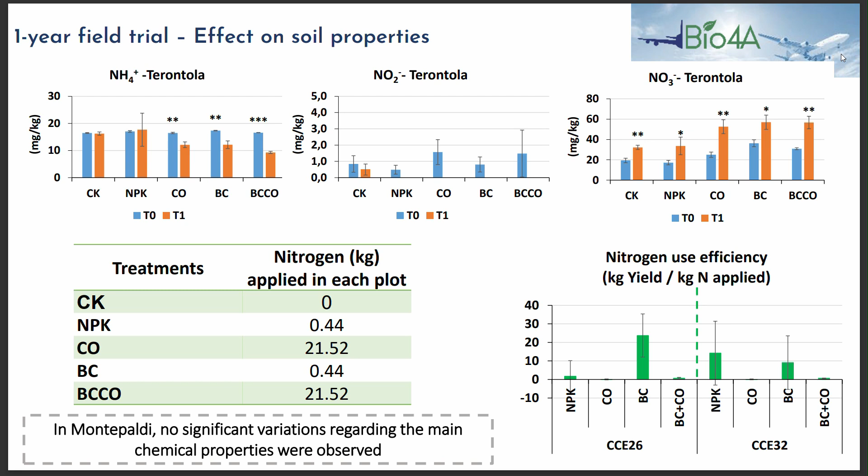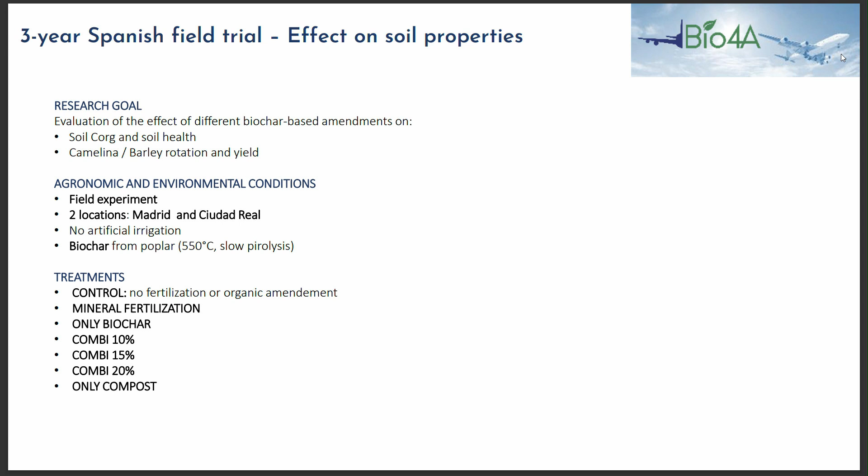But here we have results on soil that are a little older, so 3 years. So the carbon stock, here again we had 2 locations in Spain. We had only one statistically significant difference, which was for the incorporation of biochar. So the carbon stock, if you use the ESM calculation method, was increased using biochar.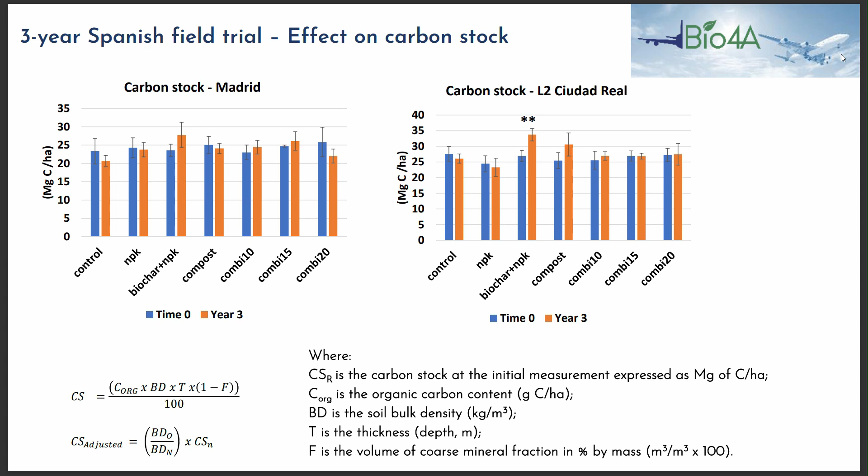You can see also that there are some confusing elements when you go to compost and combi, which is the co-composted biochar. So some things that we don't really understand about the carbon stock in soil.

However, there are some take-home messages: it is possible to increase carbon stock in soil through the use of biochar, and this way providing, in some cases, more than 100% of greenhouse gas savings when applying the ESCA calculation. So actually a negative fuel.

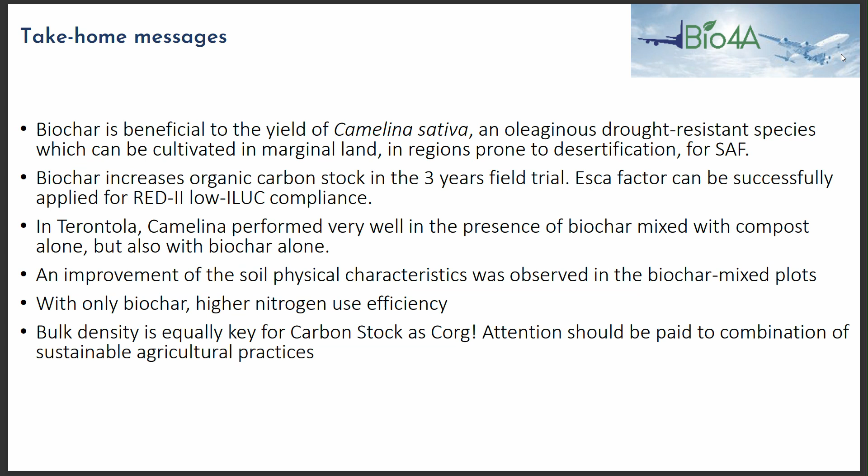So we successfully demonstrated that biochar is a good and advantageous possibility for farmers to increase their yield, make carbon sequestration, and for SAF producers to access the greenhouse gas savings provided by the ESCA factor. Okay, I think this is all. Thanks for your attention.

Questions about the topic? Yeah, maybe I have a question about the residues of camelina when you take the lipids. The residues are not good for animal food? Do they have toxins?

So there is the problem, you mean the camelina cake after extraction? Yes. I'm not a specialist in the genetics of that plant. However, I know that there are some varieties that have higher erucic acid, which is what doesn't make it fit for feed. However, there is also genetic research on developing varieties with lower erucic acid. But I know for sure that, for example, from camelina cake you can extract many proteins, as was said before for algae, and compounds of interest for the cosmetic industry, for example.

Okay, I have a second question about the limits. How many times can we put the biochar in the soil? Is there a limitation? That's a very good question.

Actually, I'm sorry I didn't mention this before. We applied biochar at the beginning of the project. This means that doing this application once, after 5 years you have your oil production that inherits the greenhouse gas savings done at the first year. So this is very different from fertilizer.